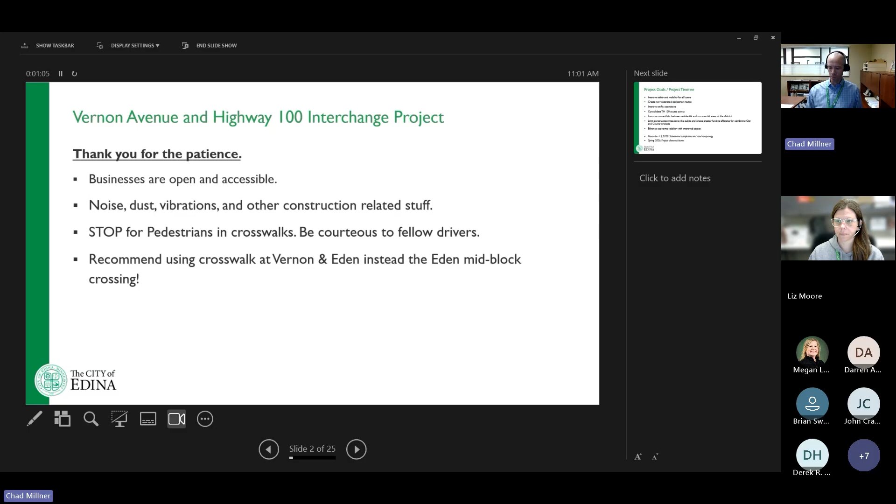Again, we always share the project goals. We're here to improve safety and mobility of all users, improve traffic operations, create separated pedestrian routes, and improve connectivity in the area. We'll talk a little bit about schedule as we go through the presentation today.

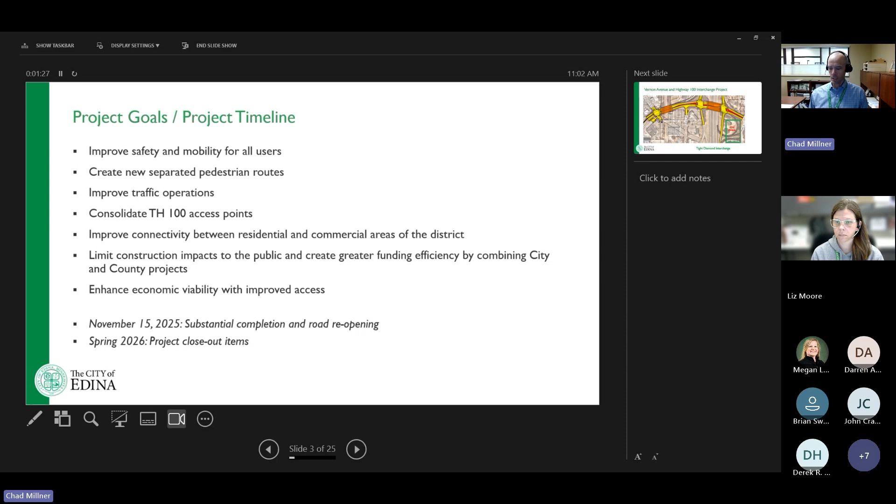This is the project. It starts west of Interlachen Boulevard. We have the Vernon Avenue Bridge over CPKC Rail, and then the bridge over Highway 100. So this is the project, and the interchange at 100 is called a tight diamond interchange.

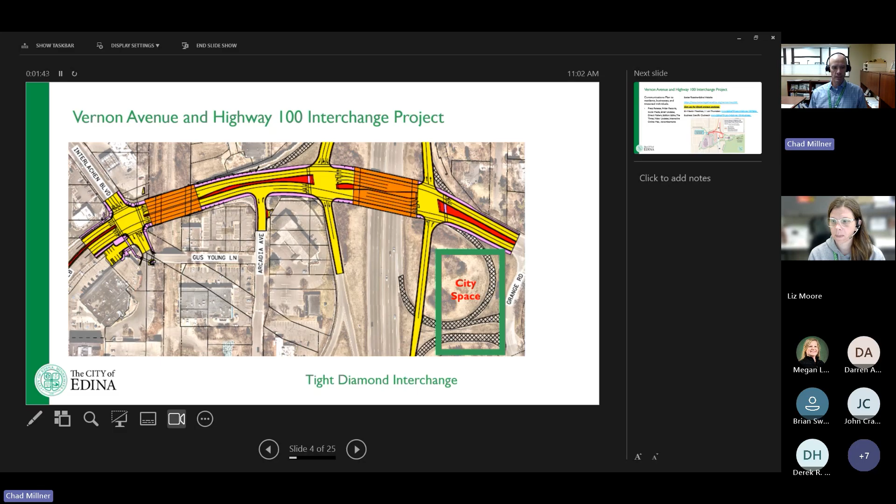Lots of ways to communicate. We have this bi-weekly meeting every other week, 11 a.m. Thursdays. We have a Better Together Edina website, bettertogetheredina.org/Vernon-HWY100. We've also been doing press releases, Friday reports, email updates, direct mailers, and lots of different ways to communicate with people in the area, people traveling through, and businesses, with a lot of information posted to the website. So if you're looking for more info, check out the website, and if you haven't signed up for emails, do that too.

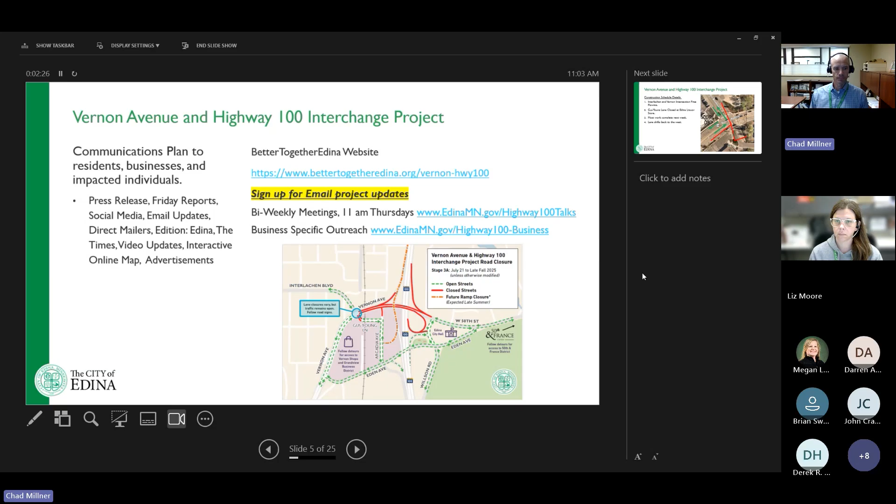So some specific details of where the project is at this point. Starting at the Vernon Interlachen intersection, that is and continues to be free flowing. There's no signal there today. Gus Young is still closed by the Edina Liquor Store. Most of that work is complete, and will be complete this week or next week. Then they'll be shifting traffic back to the west, closer to the Caribou corner, as I've drawn here, and it'll continue to be free flowing there as long as they need to complete the rest of the work east of this intersection. So look for some slight changes as they wrap up this work in the next week or so.

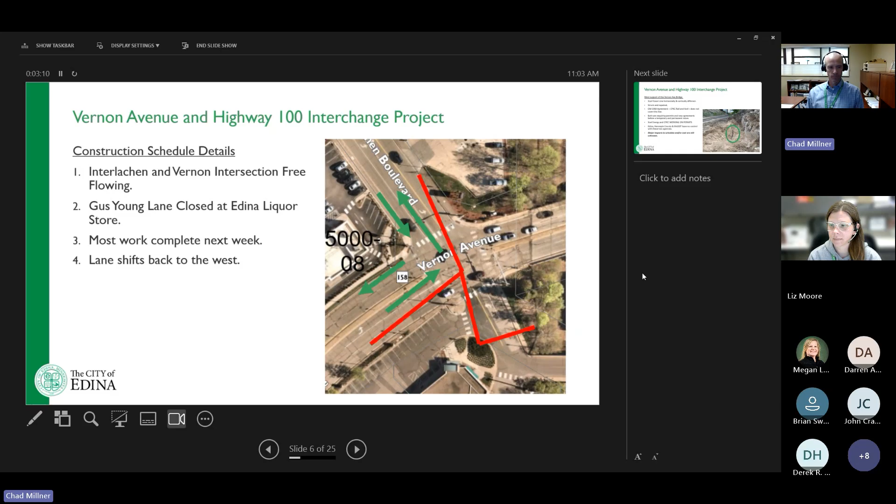The power line - we've talked about this for at least 6 weeks, I believe. The Xcel power line is horizontally and vertically different in the field than what was shown on the plans. It was struck and repaired. There are no agreements yet - both parties are working on permits and agreements. There's been no construction movement on this, so what you see in the picture is still the same today. That concrete is from the old bridge.

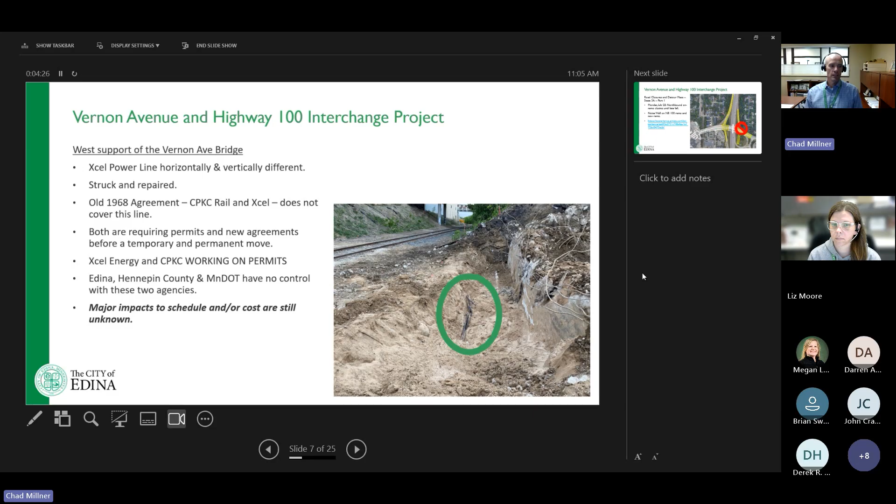I'm having major concerns - major impacts to schedule and cost are coming. We don't even know what that impact is yet until we can actually get Xcel and CPKC to get a permit to move this stuff around. I'm very concerned about how this is going to impact the entire project, because this has been 3 months and it's still sitting in the same spot. Neither agency was willing to do any kind of temporary moves. So more to come on this once we know when the permits will be done and when the contractor could potentially assist with some of the work. Once we know that, the contractor can put together some schedules and potential cost implications to the project.

Last week, on Monday, July 28th, the northbound on-ramp from 50th Street was closed. It's closed until the fall, so they can build the ramp realignment and the noise wall from Minnehaha Creek up to 50th. Again, there's GIS mapping, with a link that shows the different detour mapping. One detour is along Highway 100 - you'd exit eastbound on 62, then stay and exit right away again to northbound 100. The other detour uses the local frontage roads on each side of 100 down to Benton Avenue.

We know Benton Avenue is experiencing more traffic and delays at that location. We've been working with MnDOT, and they did retime the on-ramp signals for that northbound exit. We'll continue to look at that and work with MnDOT, but just know that Benton Avenue has had a big increase in traffic, and it's going to get worse.

School starts August 25th. We've got Edina schools right at this location, and we have OLG on Eden and Arcadia area. So in a couple of weeks, we're going to have all the school traffic back at both these locations.

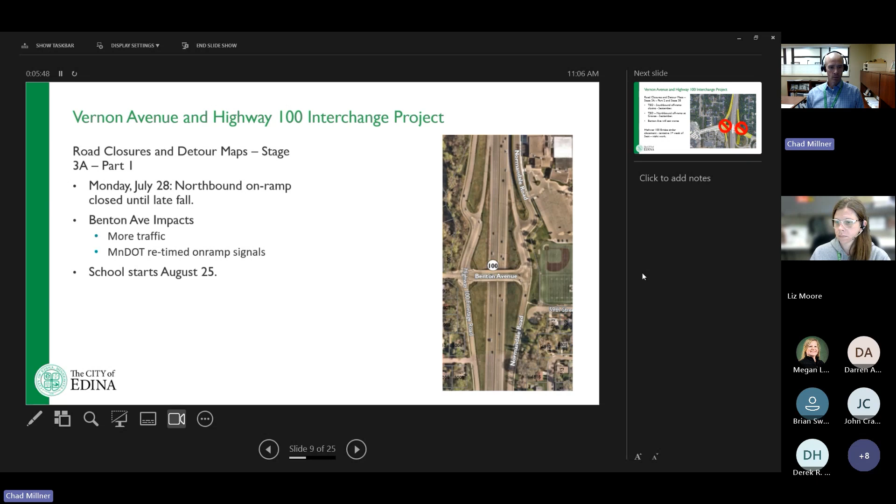What's coming up? At some point we need to do Stage 3A Part 2, which is the westbound ramps, or the southbound off ramps. Sometime in September, we don't have a hard date yet, that is going to close.

We also need to do Stage 3B, which is the northbound exit to Grange. They have to build that ramp there too, so that one will need to change. We have 2 ramp closures still to conduct. Sometime in September, when we know those dates, we'll be sharing those out.

So Benton Avenue will get worse with those closures also. It is going to get worse before it gets better from a traffic standpoint within this area.

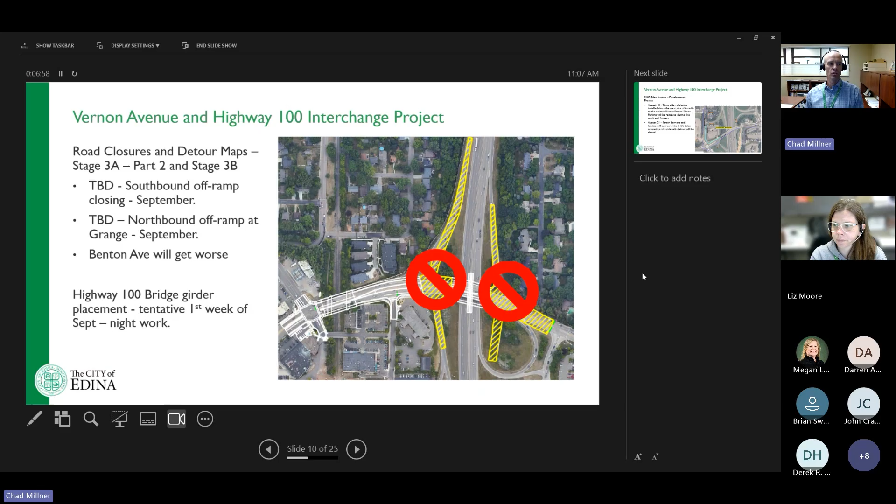Some cool things: the bridge is going to start to really take shape the first week of September. If everything goes according to schedule, the girders are going to show up overnight - 2 nights for northbound, 2 nights for southbound - placing those girders over the highway. That's really going to start to take shape. That Highway 100 bridge is moving forward very nicely.

Another thing that's going to start to impact stuff is the 5100 Eden Avenue. It was a development project approved by the city council. They are going to start some temporary work starting August 18th.

As shown in this graphic, they're going to build a temporary sidewalk along the west side of Arcadia Avenue, from just north of the roundabout at Arcadia and Eden up to the crosswalk near the Vernon Shops. During this work, the parking will be removed along the west side, and they'll have flaggers out there.

Once that work is complete, the parking will be reestablished. Also during that week, they'll install jersey barriers and fencing around their property as they get ready to start demo and grading operations for their project.

That blue dashed line is the sidewalk detour. There'll be signs placed over at the roundabout at Grange to use that crosswalk and use the south sidewalk along Eden Avenue around the Eden Arcadia roundabout, and then use this new west temporary sidewalk up the west side of Arcadia, where there is no sidewalk today, so they're building that. They need to close the sidewalk adjacent to that parcel on both Eden and Arcadia so they can safely work on that parcel.

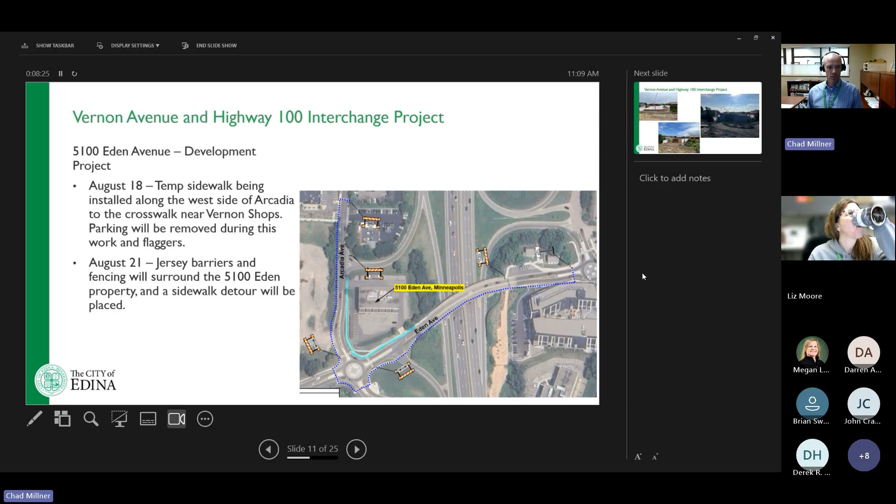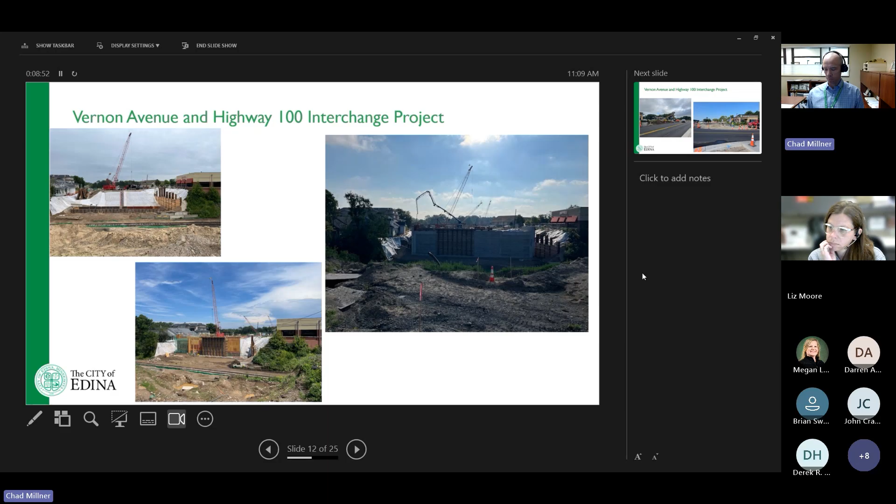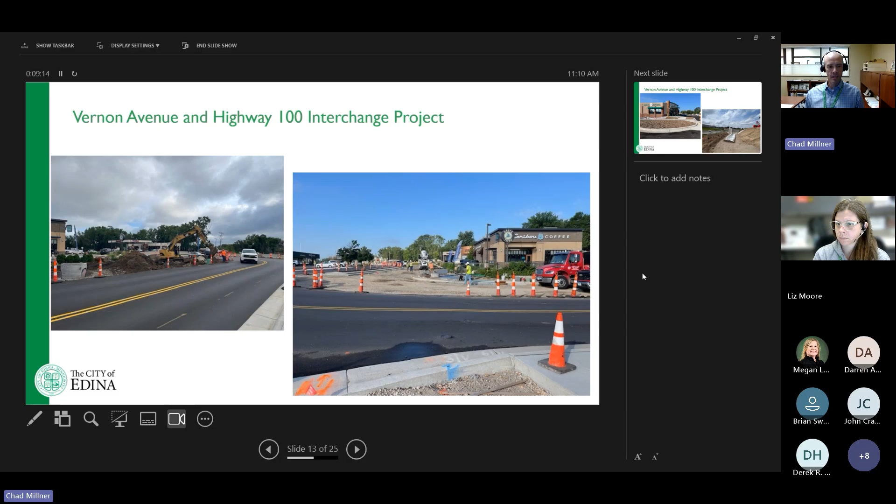This is the intersection. The one on the left was from 2 weeks ago where they were still doing utility work. Photo on the right is what it looks like today - they have curb and gutter in, they're pouring sidewalks, you can see the signal base is in, and then they'll be paving next week and then shifting this traffic back over to that side in that intersection like I discussed earlier.

The area in front of the Edina liquor store is complete. This is a picture of that, and we got the bike racks installed in this photo on the left. On the right is a photo looking west - that's Washburn-McReavy Funeral Chapel in the background.

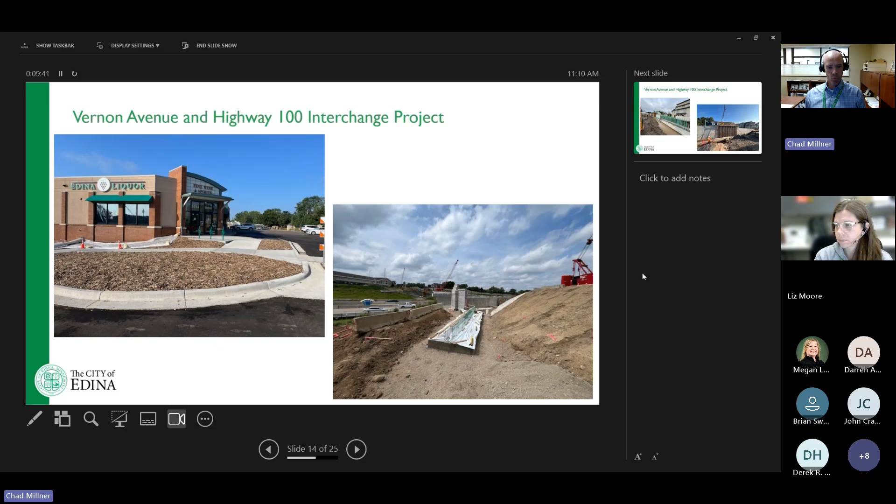This is the east side of the Highway 100 bridge, just seeing some of the work taking shape there on the east side of Highway 100.

This is near Hawthorne Court, Hawthorne Apartments. The one on the left was a photo from a couple weeks ago, and the one on the right is from this morning, as they continue to pour that retaining wall before the noise wall gets installed on top of it.

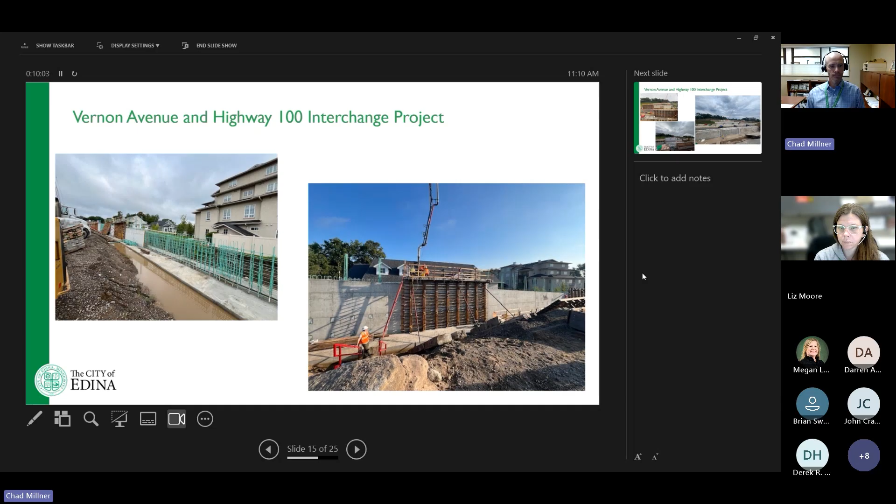This is looking east towards City Hall. You can see the Grange traffic signals in the background. Photo on the upper left was from 4 weeks ago, bottom left was from 2 weeks ago, and the bigger photo on the right is from this morning, showing all the bridge supports and foundation work that's happened as they get ready for those girders in a few weeks, first early September.

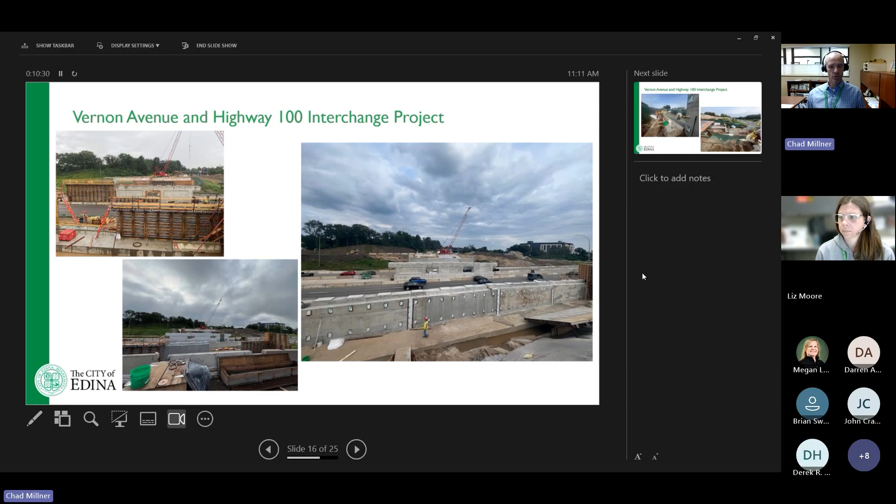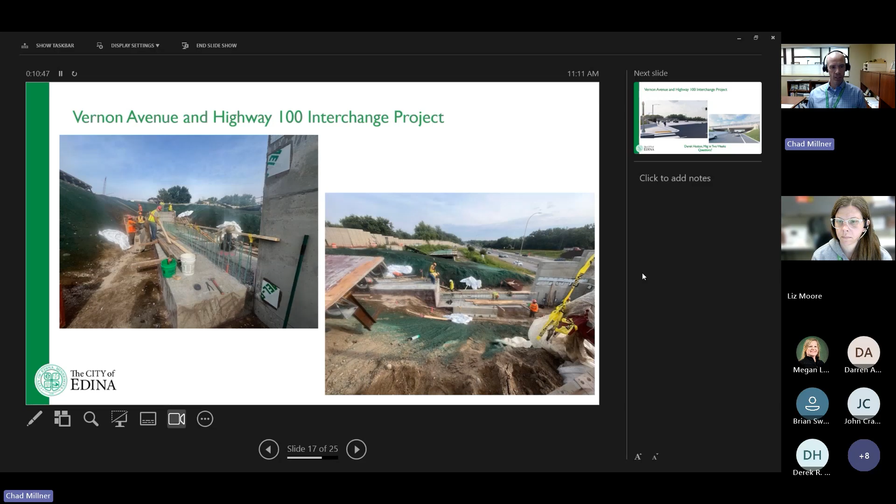A couple zoomed in more to give you some scale of the bridge and the work these guys are doing. So both left and right are on the Highway 100 bridge. I think they're both on the west side of Highway 100, but just giving you an idea of the work they're doing and the scale there.